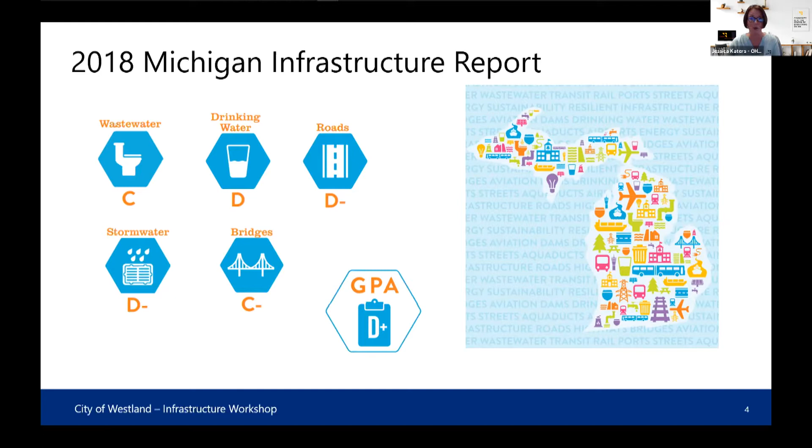The one piece of infrastructure that most people see is your roads. In Southeast Michigan, SEMCOG does an overall road condition rating. They've taken all of their communities and counties and assessed that 21% of the roads are in good condition, 35% are fair, and the rest, 44%, are in poor condition.

The sanitary and sewer systems—SEMCOG has also taken a look at those. Those systems were installed in the 50s and 60s. They're nearing their lifespan, and without rehabilitation or replacement, they will continue to fail us or have breaks and issues with delivering services to our customers.

It's been estimated that Michigan needs an additional $4 billion a year to maintain the existing infrastructure, and this is all from the 2018 report card. We all know that there has not been a major infrastructure infusion of money over the past 2 years, so we are still at this current level of funding need, and there is not currently a funding mechanism to fulfill this need.

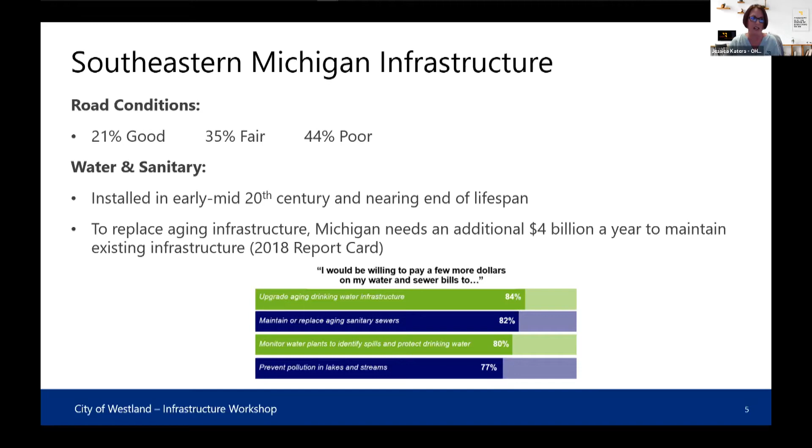One thing that SEMCOG has done is taken a look and surveyed the residents and customers in the region, and they have stated that they are willing to pay a little bit extra in order to upgrade their aging infrastructure, to have a more reliable system, and to replace their aging sanitary sewer systems, to increase the quality of the water delivered to their homes and businesses, and prevent pollution in the lakes and streams and recreation areas that we enjoy here in Southeast Michigan. So it does seem that the customers and citizens of this area certainly understand that there needs to be additional investment in our infrastructure.

One of the infrastructure networks that was part of the campaign for governor last go-around was the Rebuilding Michigan Roads, and we know that there is $800 million in bonds for state infrastructure. This is all great, and it will be a great investment in the MDOT network of roads.

The 5-year transportation plan includes 46 projects of all different magnitudes. The black here shows the projects that are surrounding your area, so there are quite a few highways and freeways in this area that are going to get touched. However, none of this money is going to go to county or local roads, so there's still a need at the local level in order to invest in your road systems.

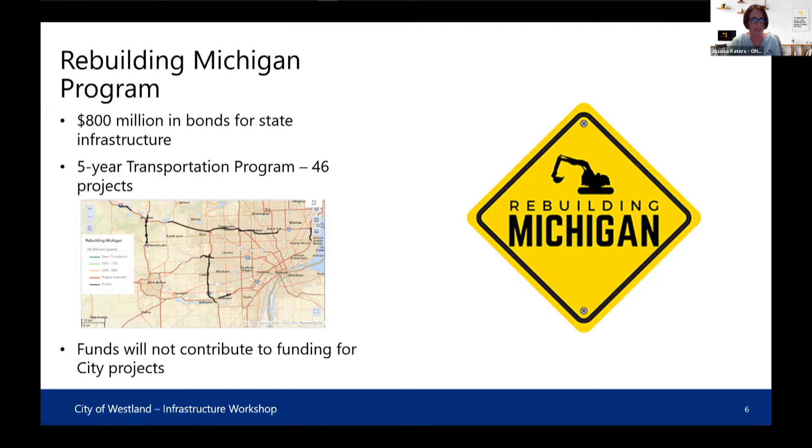When we look at an infrastructure network, it's a layered system, and we want to take a look at it from the bottom layer up. The first layer we want to look at is our sanitary sewer system. Then we'll take a look at water, and then Ramsey is going to give you a summary of your roads and drainage.

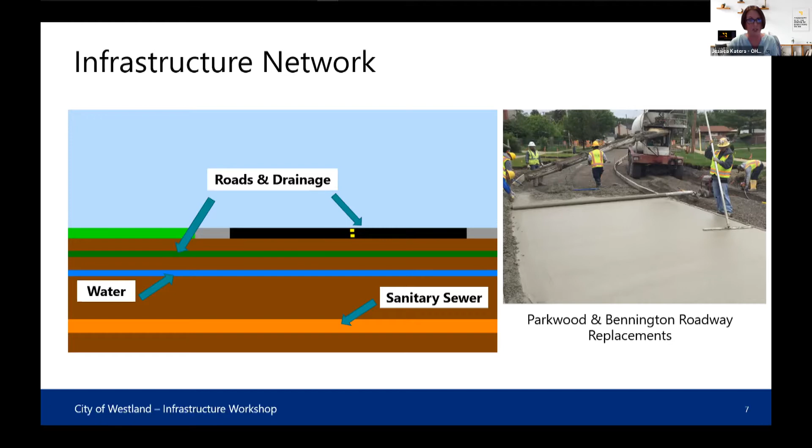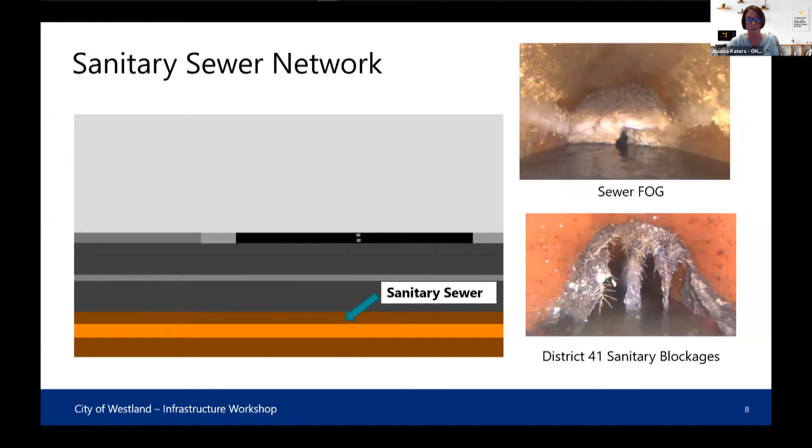Your sanitary sewer network—these are a couple pictures from some of the assessments that have been recently done. It's an unseen network that you never talk about or have much conversation about unless it fails or doesn't do its job. Unfortunately, this type of distress accumulates until we get to a point where we need to do rehabilitation or replacement of the system in order to restore the customer service.

Our network of sewer within Westland—we have 293 miles of sanitary sewer, so it basically mimics the number of road miles, a little bit more than what you have in roads. You have over 7,000 sanitary sewer manholes, so it's a very extensive network of sewage collection system. Some of the sewer pipes are owned by Wayne County, but a good majority of this mileage is owned and maintained by the city of Westland.

Of all of this, about 50% of these sanitary sewers are within the rear yards. Those rear yard sanitary sewer systems are where we find a lot of our failures to occur because we have root intrusion or a collapse of a sewer. Those sanitary sewer systems are of a certain age, a certain material type, and they happen to be in a location where they need rehabilitation in order to continue to function.

Currently, the DPW has partnered with contractors over the last few years to line this system, and we've gotten 5% of the system lined. An additional 95% of this—the 50% of the rear yard system—is still in need of rehabilitation.

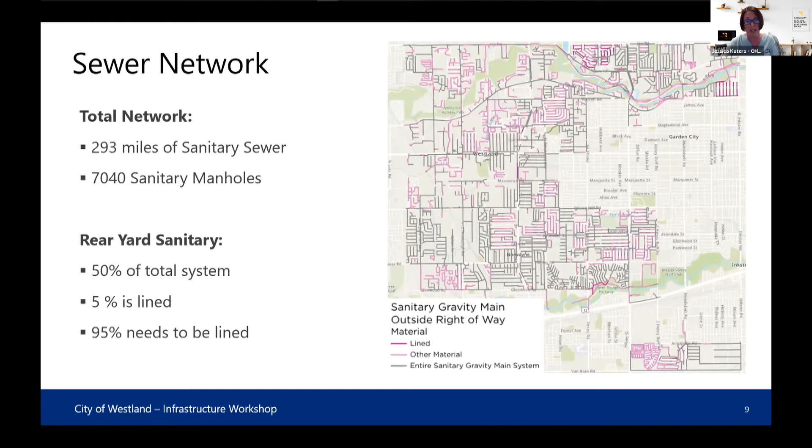When I speak of lining, the rehabilitation methodology that we use for sanitary sewers is cured-in-place pipe, CIPP liner. This gives us another 50 years of lifetime of usage out of this utility.

If you can see here in this picture, this is of a rear yard sanitary sewer. You see that there's cracking in the sewer and then root intrusion. All of this combined adds up to an area that can fail and would possibly cause backups or a collapse in a rear yard.

So the sewer liner gives us, like I said, that additional 50 years of lifetime. It provides us structural integrity, and this is called trenchless technology. It's something that we're able to do with little to no disruption to the residents or the businesses that send their sewage to these pipelines.

Once the sewer is lined, it's ready for service almost immediately. So it's a methodology that gives good customer service.

Currently, the spending is around $2 million per year. This gets us about 7 miles per year lined. If we continued at this $2 million, it would take us another 16 years to line all of the sanitary sewer that's in the rear yards.

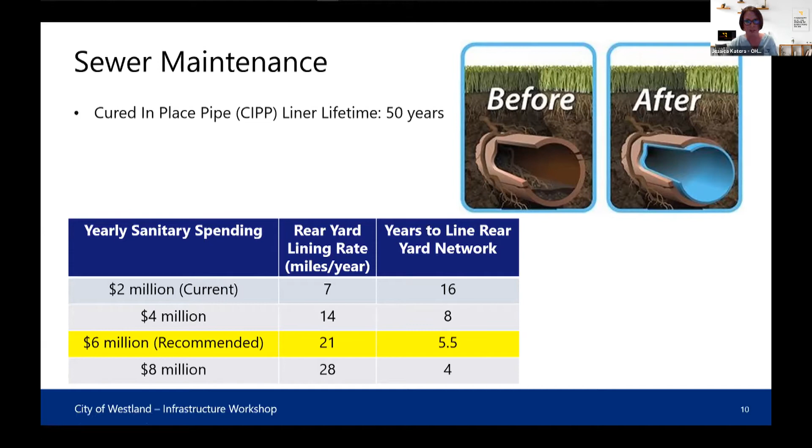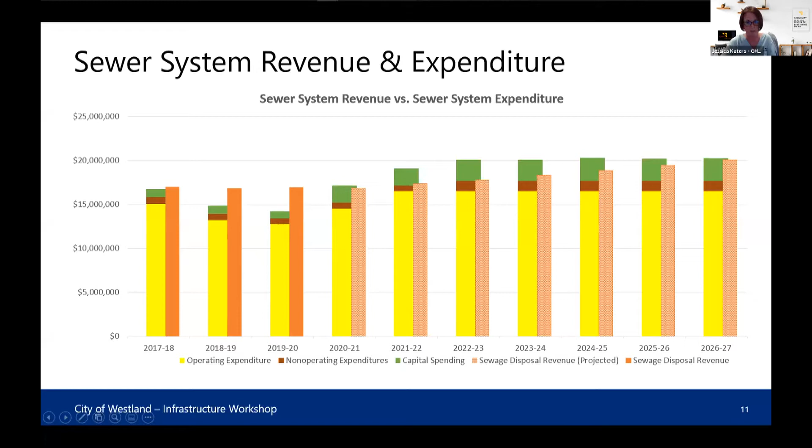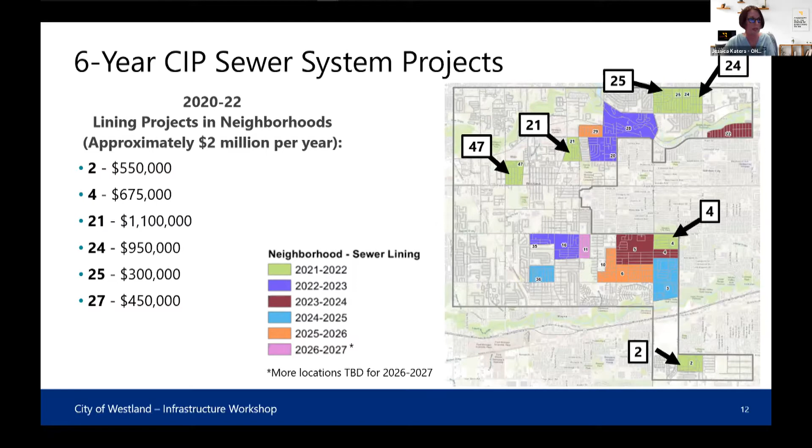The sanitary sewer system that Westland contributes to is the Rouge Valley Sanitary Disposal System. This is owned and operated by Wayne County. You're one of 14 communities that contribute sewage to the system or have their sewage collected from the system.

The city of Westland is 20% of the flow that goes into the sanitary sewer. So there's quite a bit of sewage that is captured from Westland and contributes to the RVSDS. You are one of the major players in the system.

There are proposed upcoming CIP projects that the system needs to incur that will be done by RVSDS, but are incorporated in any rate increases that the county passes on to the 14 communities that contribute to this system. So in regards to this fiscal year, there is manhole rehabilitation that will take I&I, inflow and infiltration, out of the system.

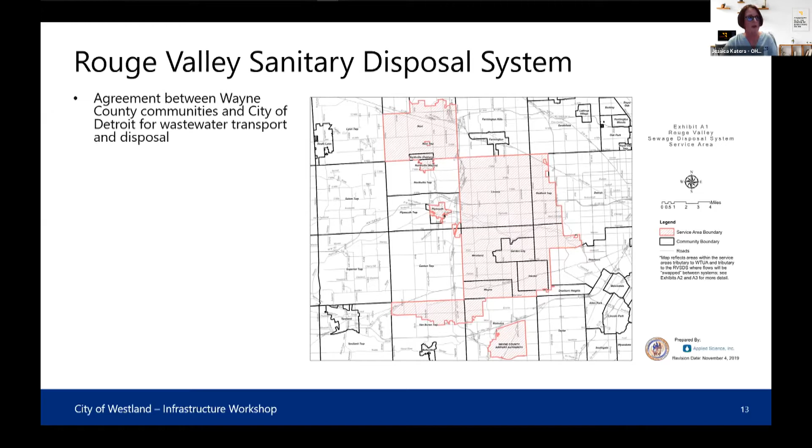That will give additional capacity to the system that was being utilized by rainwater, basically. This agreement was entered into in 2017 between the Wayne County communities and the city of Detroit.

The long-term plan, they are applying for a state revolving fund, and that fund is going to help with those CIP projects. So the more money that is available through that fund, or that would be forgiven through a loan forgiveness program, would reduce the cost to the city of Westland.

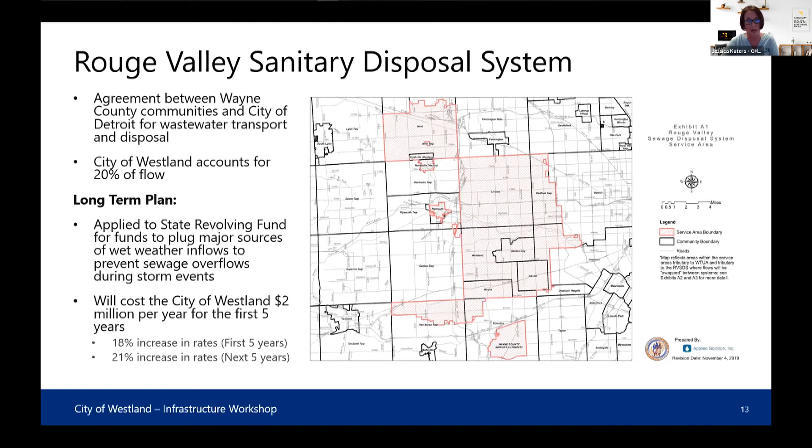That 2017 agreement with the county had an 18% increase built into the first 5 years, and then a 21% increase built into the next 5 years. And that is something that you are currently seeing. The annual payment to the county is around $14 million for sewage disposal right now.

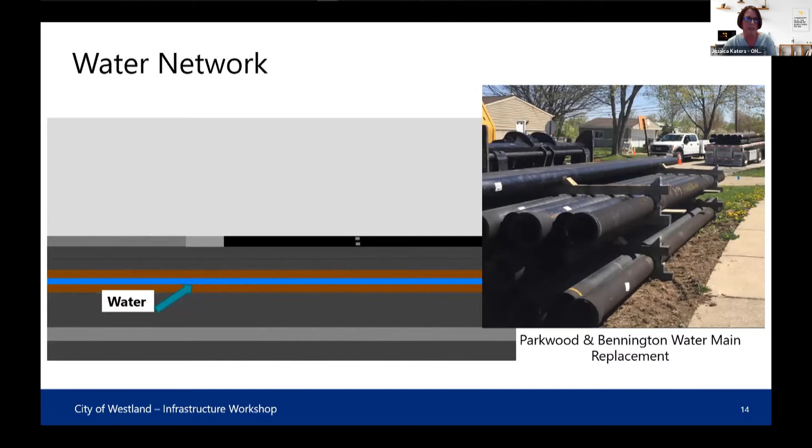The next system that we want to talk about as we move up in the levels is the water network. The water network has about 318 miles of water main, just over 3,200 fire hydrants, and 3,700 gate valves.

This picture, or this map of your water system—all of the blue is water main that is owned and maintained by the city of Westland. The red is your distribution mains from GLWA, and each of these squares are your distribution points from GLWA, so where you're getting water.

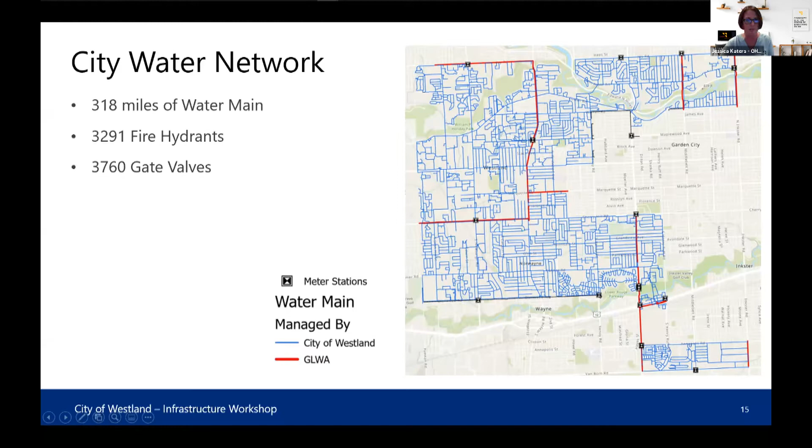Your water main material and your water main age go hand in hand. Water main of a certain age, installed in the 50s and 60s, was cast iron. Then we moved over into ductile iron in the 80s and 90s. We're using HDPE now when we're doing pipe bursting projects. Each one of these materials has a different lifespan.

What we find is that cast iron breaks much more often. It is older and is reaching its lifespan. So you have 80% of your system that is cast iron, and the other 20% is some of those other materials I mentioned. Most of that cast iron, 63% of the overall system, is over 50 years old.

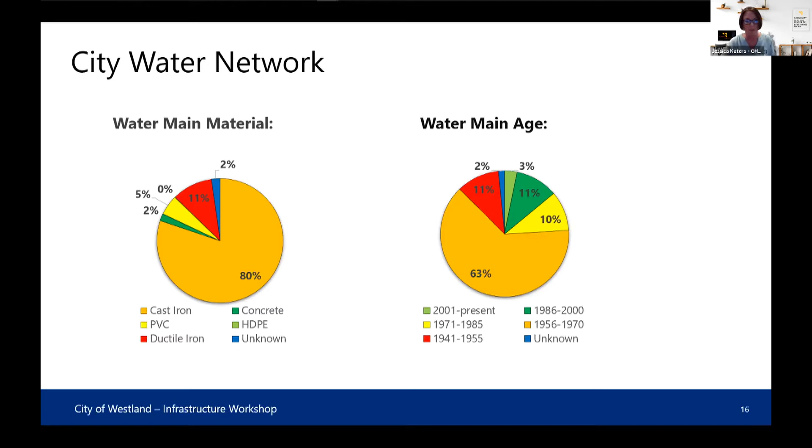One of the things OHM has helped with in the past is completing a water asset management plan. In that plan, we took a look at all of the water mains, the age of the water main, the criticality of the water main, what kind of users it serviced, whether it served a hospital or a school, and also the material of the water main, and came up with a condition assessment for those water mains.

So overall, the system for Westland is a lower risk system, and it matches your adjacent communities as well.

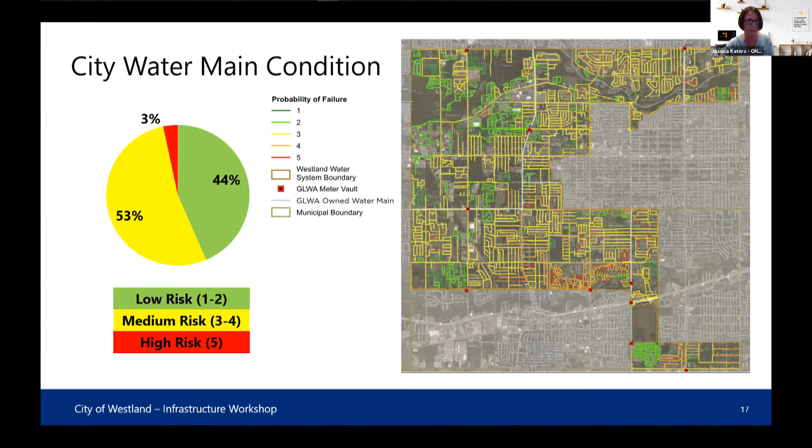Those breaks range from a $4,000 fix to a $10,000 fix, so we're seeing around $500,000 spent on break repair. You can see that the newer sections within the city of Westland just don't have the same amount of breaks as some of the older sections that have that cast iron material.

These numbers of breaks are average. This is an average for that age and that type of material. This isn't out of the ordinary for a system this age.

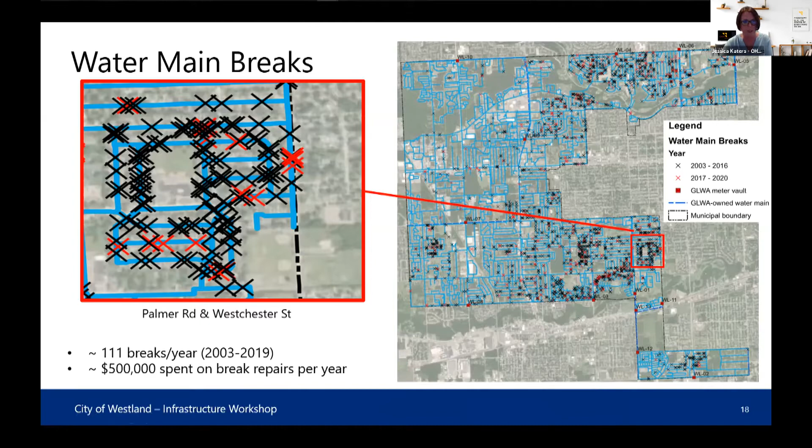Water system replacement tends to be a little bit more expensive than sanitary, especially because most of the time, water system replacement involves either removing or pipe bursting the pipe within the same trench it's currently located in, or installing an all-new system in order to maintain water service for customers during the construction period. So it does tend to be a little bit more costly.

The water main also ends up being underneath pavement in some of the subdivisions, and when you're within the pavement influence, the pavement also has to get replaced with those projects. We're on average replacing about three quarters of a mile per year. On average, it costs from $1 million to $2.5 million, depending on the location of the water main and its size.

Taking all of the water main that had 2 or more breaks within the system, you have approximately 60 miles. At the current rate, it would take us another 80 years to replace all of that water main. If we were to jump up to about 3 miles per year, we'd be looking at a 20-year capital improvement plan in order to replace that water main.

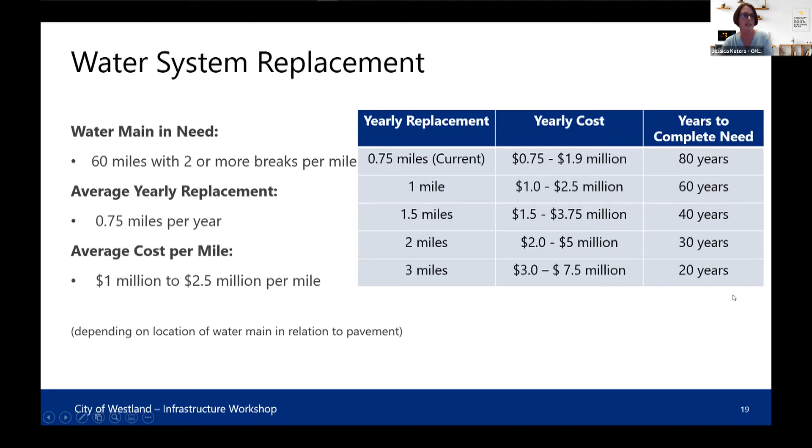But you certainly are jumping up in cost, to a $3 million to $7.5 million mark, if we were to hit that 3 miles per year as an annual replacement rate.

So the next step is to take a look and see what that does to your revenue stream and the operating cost for the system already.

Taking a look here, your operating expenditure includes your payments to GLWA, which on average is about $7 million annually. Then all of your labor, equipment, parts, and energy or power in order to operate the system, your debt payments, and then the green is the CIP — those are your project payments every year, the project work and project budgets. The orange is the revenue that has been collected from the system, and the projected revenues are shown in that dashed line.

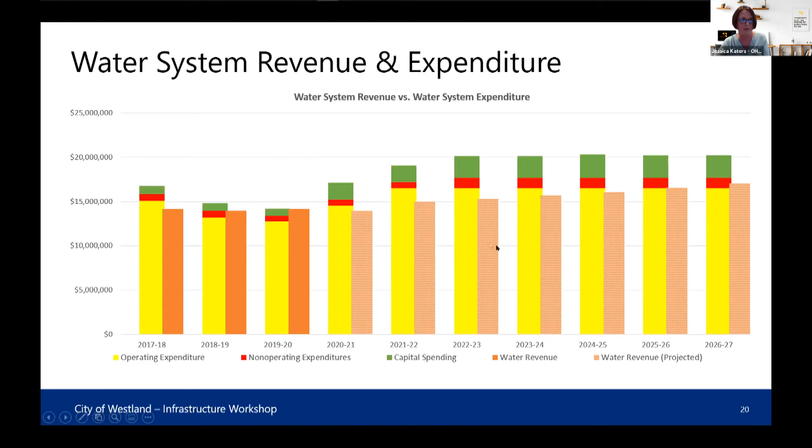You are on your third year of a rate study that was done in 2018. I believe the finance department will be bringing forward a proposal to reevaluate and analyze the rates again. Part of that reevaluation will be to take a look and see how much you want to spend in CIP work to rehab and upgrade the systems to keep them functioning.

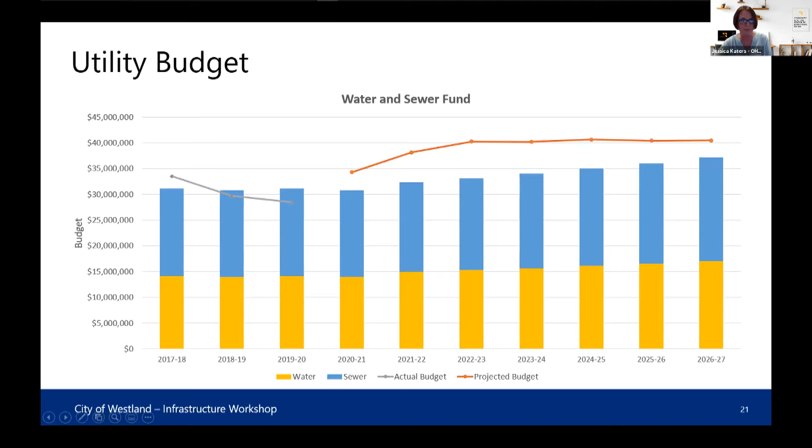Again, like the sanitary sewer, we have certain neighborhoods that we're targeting for the water with the DPW, the administration there. We've sat down and taken a look at those neighborhoods and come up with a 6-year CIP water system project plan.

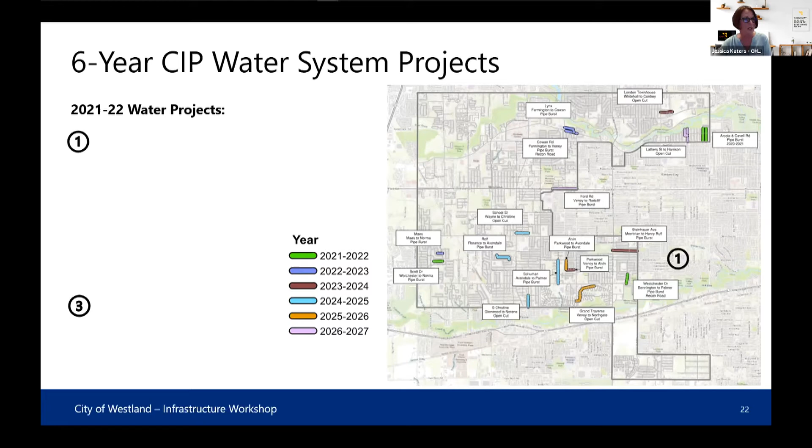We are looking at pipe bursting and road reconstruction from Westchester. Again, another pipe bursting project, Scott Road from Worchester to Norma. And then the other component of the 6-year CIP plan is replacements of galvanized water services.

This is to be in compliance with the 2018 lead and copper ruling that came about in Michigan. In order to be in compliance with that ruling, we had to file an inventory in 2020 of where we were with the lead, copper, and galvanized services. A final inventory of all of the services is due to EGLE by 2025. And then all lead and galvanized services must be removed from the system by January 1st of 2041.

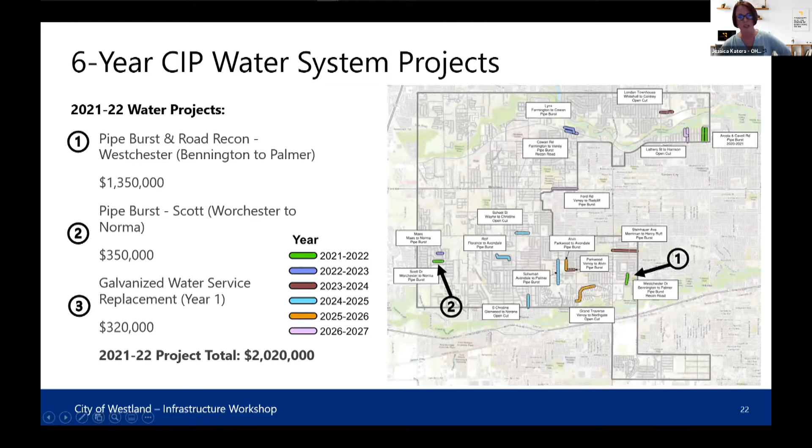Currently, the $320,000 that we were proposing over the next 19 years would replace the services that we know of right now in the system.

We have 39% of the system that has been identified. 200 of those services are known to be galvanized. We're replacing those at around 40 services per year in the 6-year CIP.

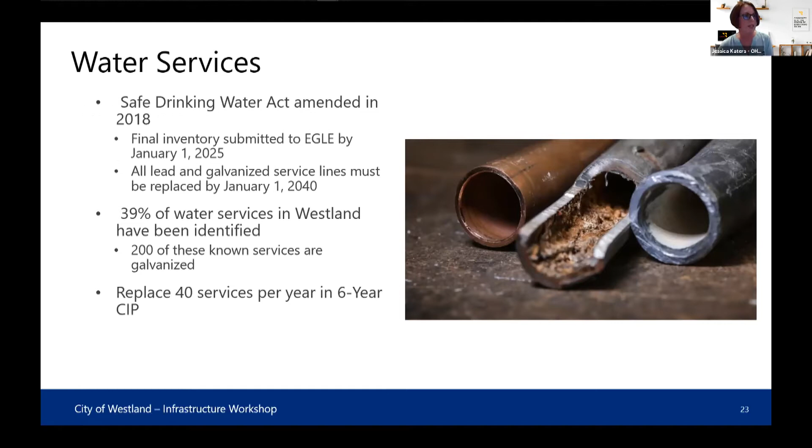And then on Earth Day, the city of Westland is going to be rolling out a program to engage the public to help identify that other 60% of the services that we aren't sure what they are currently. So there'll be some public information sent out to homes, and then the residents will be able to report back what their services are. That will help the city gauge better how much money and how many services they'll have to replace between now and that 2040 date.

The total number of services within the Westland system is just under 30,000 services.

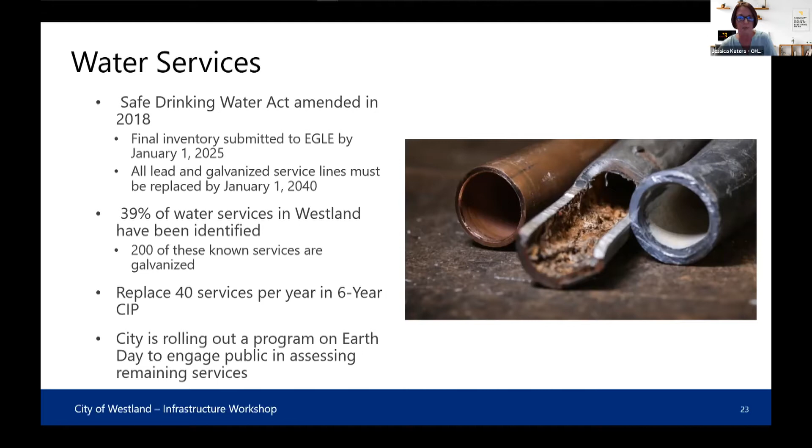One of the initiatives that the Westland City Council and Mayor Wild have taken on is investigating the potential of a water authority with some of your neighboring communities, in order to become a larger customer to GLWA. Becoming part of the water authority could lower your water rates to GLWA and free up some more capital that could be reinvested in the system. It would also allow you to be a larger voice at the table with GLWA.

You'd be a larger customer, what's considered a max day customer, which would allow for a lower revenue requirement rate for the utility authority on a whole. So if the utility authority was to form, there would be initial savings without any additional infrastructure investment.

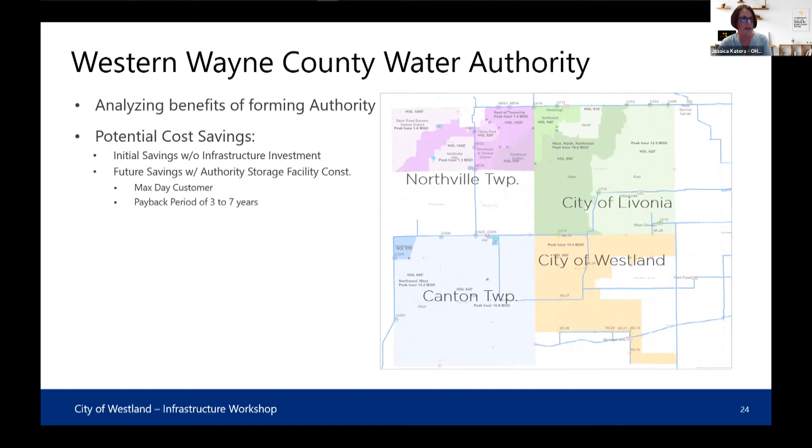There's also been an analysis that would require a storage facility to be built, and then a payback period of 3 to 7 years depending on how large the facility is. That would allow the authority to become a max day customer, which again will give us a better rate with GLWA and more of a say possibly at the table.

So the last layer of our infrastructure is the roads and drainage layer, and Ramsey was going to speak to this section. Thank you, Jessica.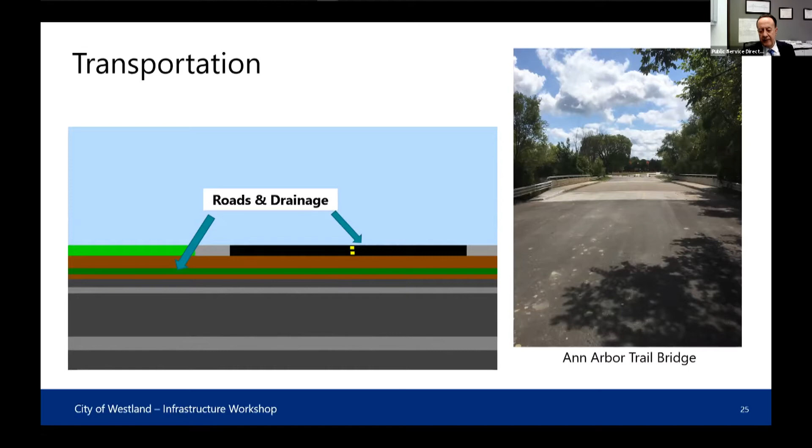As Jessica said, this is our third layer of infrastructure, which includes our road network and our drainage system, or the stormwater system that is contiguous to the road system.

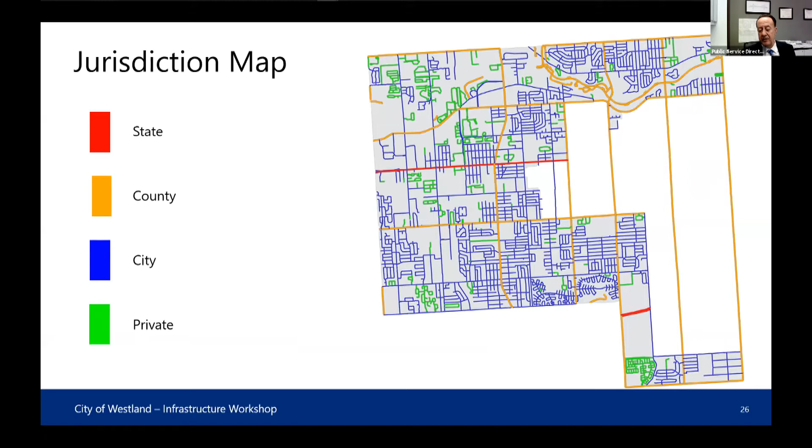This is the jurisdiction map of the city's road systems. As you know, we have state roads such as Ford and Michigan Avenue, and we have the county road system, such as Cherry Hill, Middle Belt, and Inkster Road. Then we have the city road system, which are in blue. The city road system is divided into two components: one is the local road system, like the subdivision or neighborhood streets, and the major road system, which is the collector roads, such as Hicks, Avondale, and Marquette, and those major streets in the city. And of course, we have the private roads, which are the subdivision streets not under the jurisdiction of the city.

The city road network summary: we have about 211 miles of city-owned roads, 139 miles of these roads are concrete and 65 miles asphalt, and we have about 7 miles of gravel road.

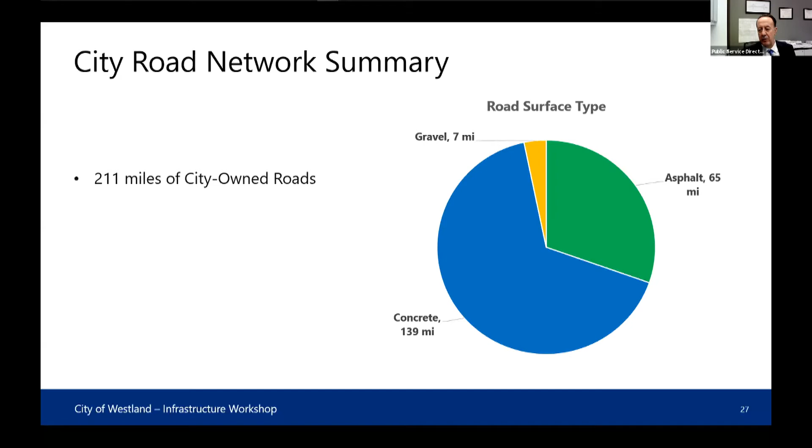We evaluate our roads using a PASER system to assess their condition. This is required by the Michigan Department of Transportation, and we have been using this system since 2005.

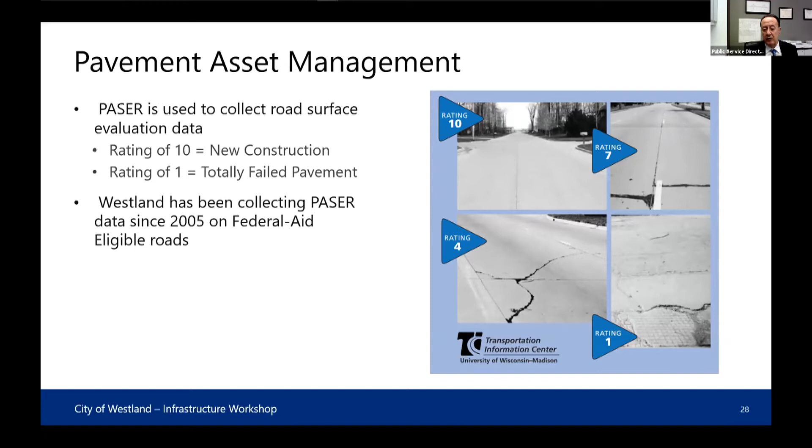PASER stands for Pavement Surface Evaluation and Rating. The rating we use is between 1 and 10, where 10 is new construction and 1 is a totally failed pavement.

This map goes back to 2019, because we do this rating every 2 years. The next one is due in 2021, and right now we are preparing to complete our rating in the next couple of months or so.

As you can see from these color-coded ratings, we have about 24 miles of our roads which we consider totally failed, and about 99 miles rated 3 to 4, which are poor.

Then 75 miles are fair, and so on. We only have about 9 miles of roads in the city that we consider good roads.

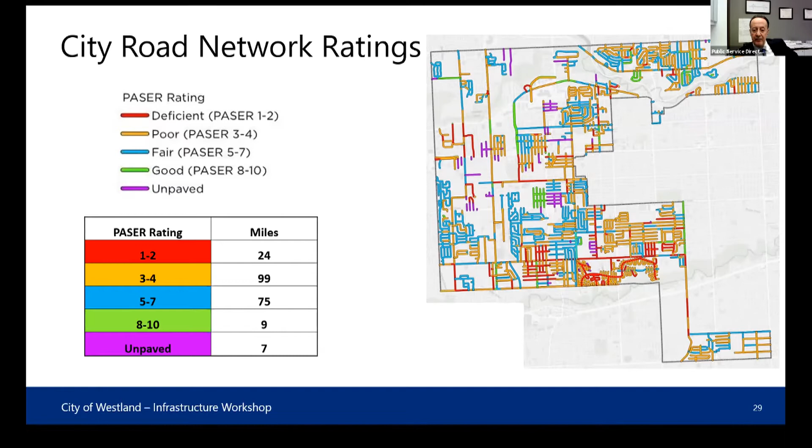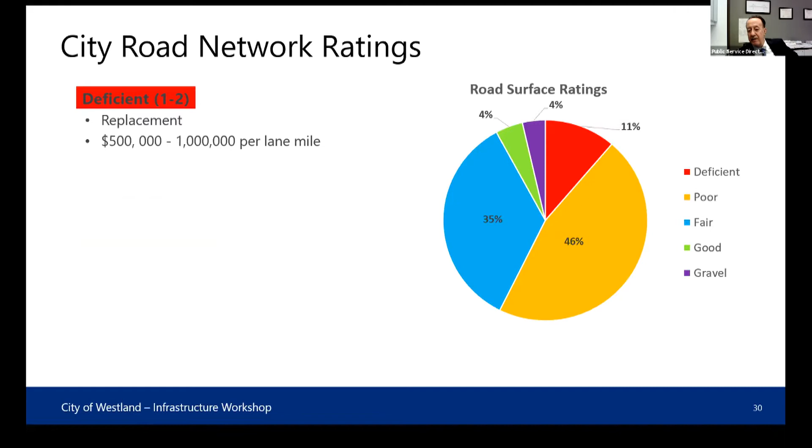As you can see, the poor and failing road ratings comprise about 57% of our roads, and 35% are fair roads.

From what you can see here, to rehabilitate a deficient road or a totally failed road, it will cost us about $500,000 to $1 million per lane mile.

The poor roads will cost us, for heavy rehab, about $350,000 per lane mile. The fair roads and better will cost between $20,000 to $30,000 per lane mile.

This is what we call preventative maintenance, which we consider between fair and good. The good roads will cost about $5,000 to $15,000 per lane mile.

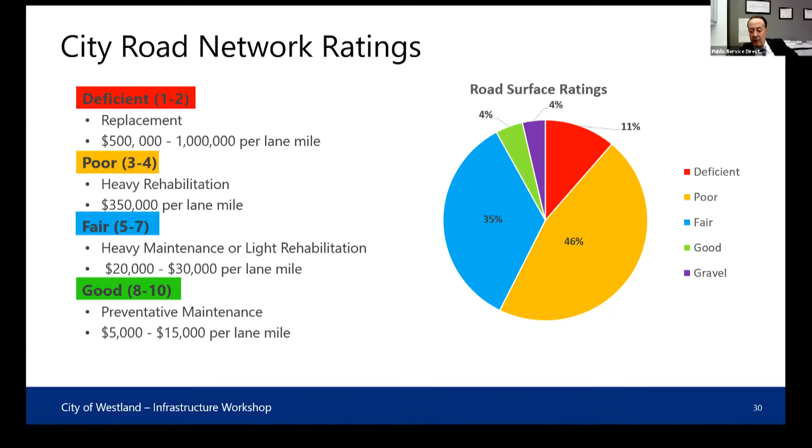Where we could extend the service life of our road system between 5 and 10 years.

We have been using preventative maintenance in the city for the past 5 years, where most of our road projects are done under preventative maintenance. As you know, this is more cost effective for maintaining our roads and keeping them safe for vehicular traffic.

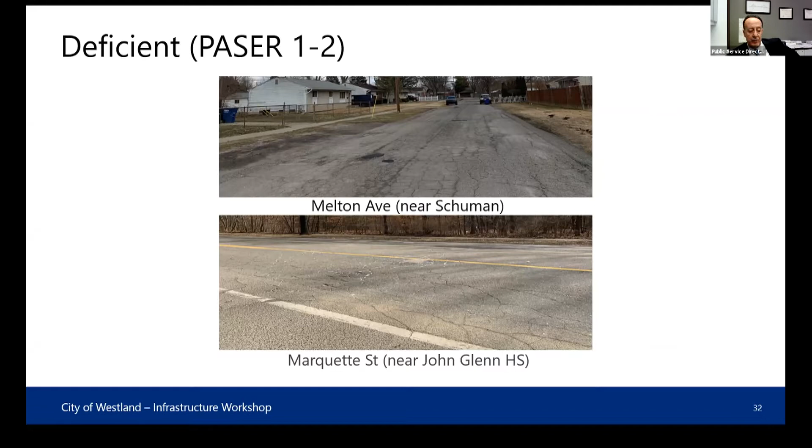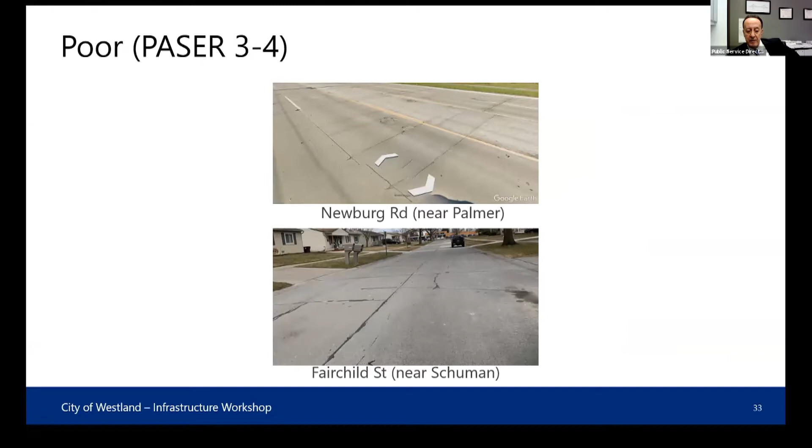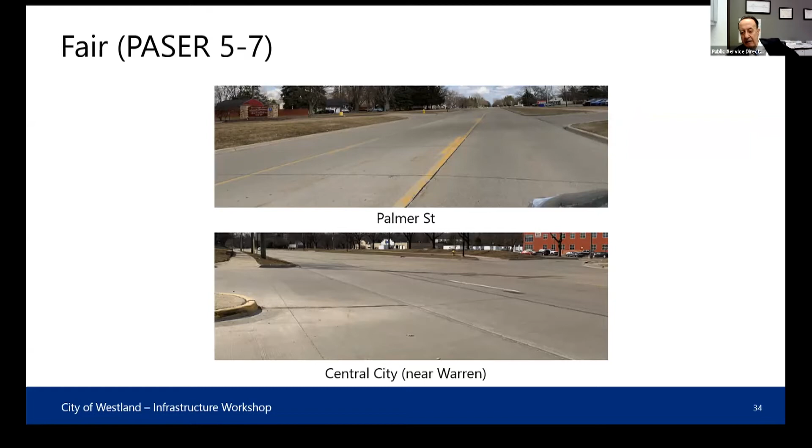This is 5 to 7, which is the fair roads in the city. This is where we want our street system to be, in a fair to good grading, between 5 and 10. This example is at Palmer Street and Central City Parkway near Warren Road.

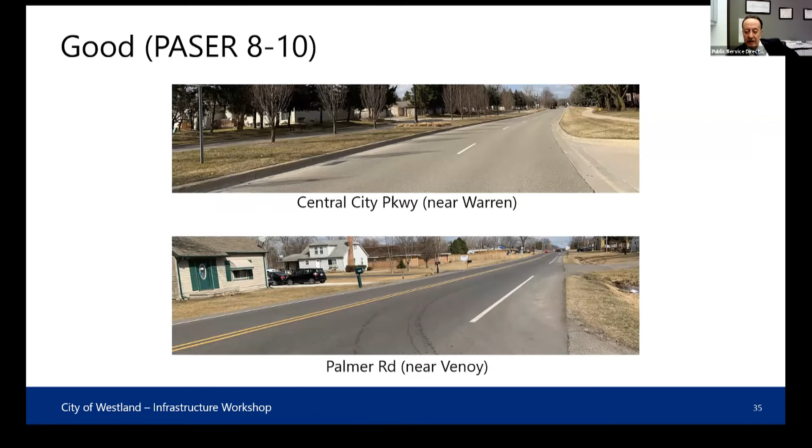As the city of Westland in Wayne County, we belong with all Wayne County communities to a committee called the Federal Aid Committee, where we receive federal funds from the state through the federal government. We receive about $16 million of funds each year.

We have a steering committee, which I have been a member of for the past 25 years, that meets to select roads to rebuild throughout Wayne County.

75% of the $16 million will go towards county road, and 25% will go towards city streets that are on the federal system. What I mean by city streets on the federal system, this is such as Newburgh Road and John Hicks Road and Ann Arbor Trail and Palmer Road. So those are city roads that are on the federal system.

And this year we are doing Newburgh Road between Cherry Hill to Ford Road. This is about $1.2 million for the federal grant that we should receive. This project should be bid by the state in June and should be constructed this summer.

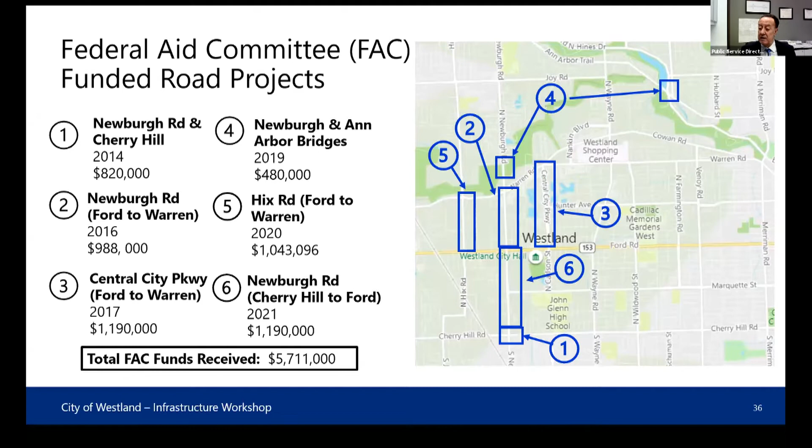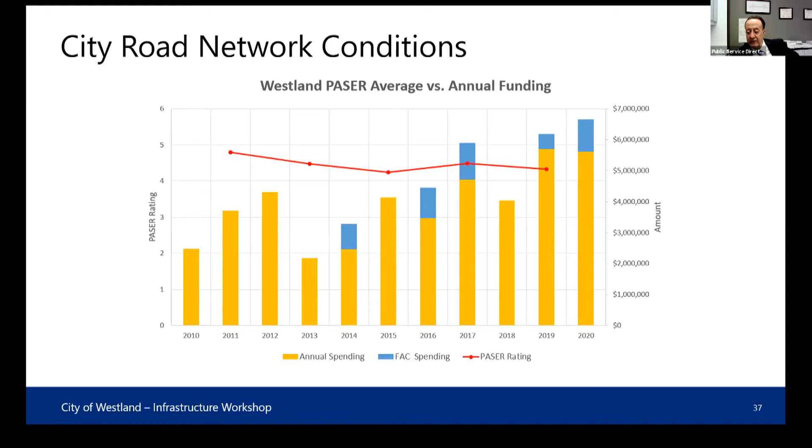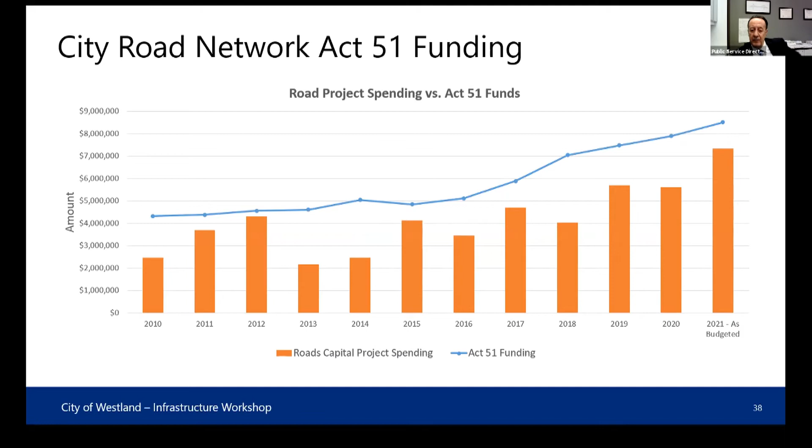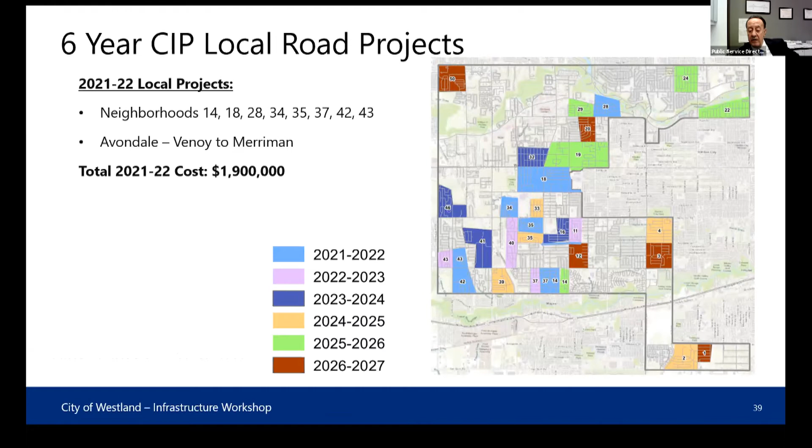And this is all the blue districts that you could see on the map, and Avondale between Venoy Road and Merriman Road. Let's go back to that slide. The total cost for 2021 to 22 local road rehab is close to $2 million.

And these are the districts that we spoke about that we will be redoing this year: neighborhood 14, which is the street limit between South Christine to Wildwood and Palmer to Glenwood; 34 is Pattingill to Lansdowne Drive and Dartmouth to Cherry Hill; neighborhood 42, south of John Hix to Barnes and Palmer to Glenwood, and so on. So we have a very progressive project year planned for this year.

The 6-year CIP for our major road program, again, is color coded per year. The green color is the streets that we will be doing this year. We are doing close to 7 major roads this year: Yale, Carlson, Superior Parkway, John Hix and Florence, Grand Traverse Phase 1, and Newburgh Road, which is the state project we just spoke about. Our local share of this project is $400,000. So we're talking about a $1.5 million job that the state would leverage about $1.2 million worth of grants for, a beautiful job we will be doing this summer.

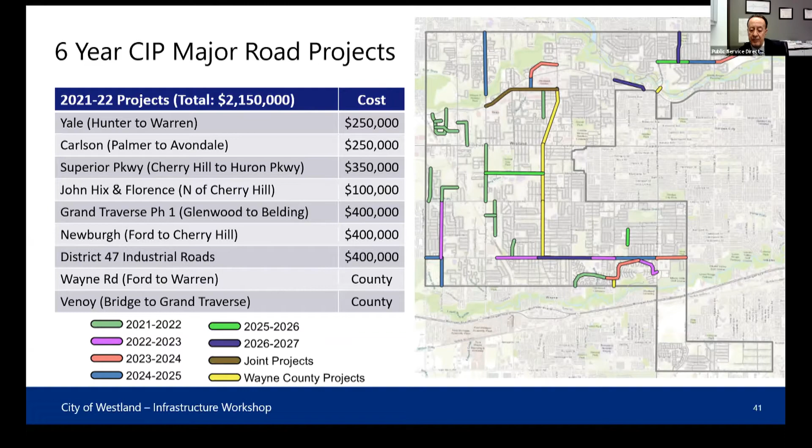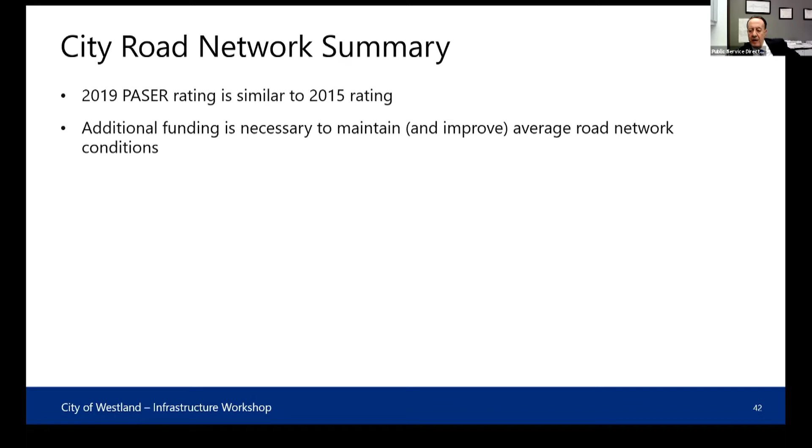The city road network summary between 2019 and 2015 is very similar, because our roads are deteriorating faster than we could maintain them. Additional funding is, of course, necessary to maintain and improve average road network conditions, which is a rating of over 5. The Transportation Asset Management Plan is due in 2022 to the state of Michigan, which will verify and update our goals for our road network.

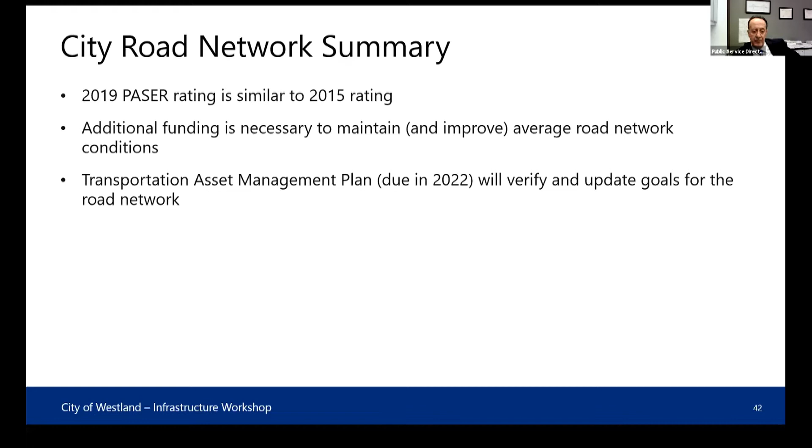The city is responsible for the maintenance of about 5 bridges in the city of Westland. These bridges are Ann Arbor Trail over the Middle Rouge, John Hix over Tonquish Creek, Newburgh Road over Tonquish Creek, Henry Ruff over the Lower River Rouge, and the CSX Railroad at Newburgh Road, which is the grade separation.

By MDOT's regulations and requirements, we have to inspect these bridges biannually. So every 2 years, we have to have an inspection regarding the elements of this bridge, superstructure and substructure, to see if there are any deficiencies. It's due this year, 2021, and we would submit to the state. Anytime we find major deficiencies, we either have to limit the loads or weight limit on that bridge, or do the required repairs.

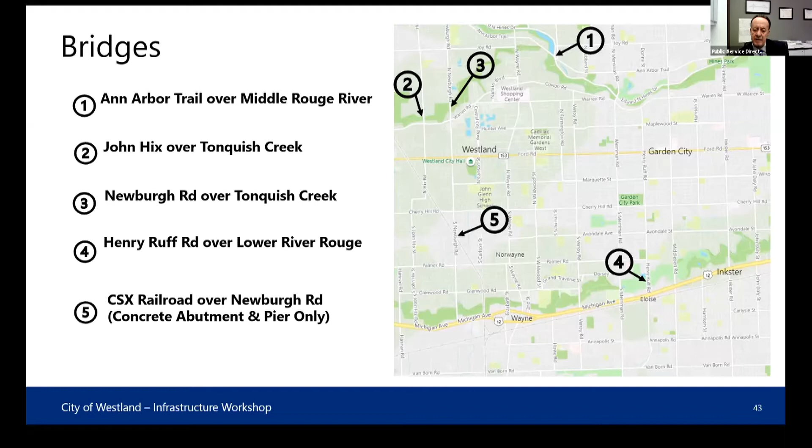We have been successful in leveraging some state money. If you remember, last year's project redid the superstructure of Newburgh Road, north of Warren, and the Ann Arbor Trail Bridge. About 4 years ago, we redid the pavement and the substructure at Henry Ruff Road over the Lower River Rouge.

We have been very successful in leveraging some TAP grant, which is Transportation Alternative Grant, to install sidewalk gaps in the city. We have received over $800,000 in the past 4 years, with the help of OHM and SEMCOG, who are the award authority. We did about 4 projects so far: in Newburgh south of Joy, Marquette in front of John Glenn High School, Schuman Road from Palmer to Avondale, and Palmer Road from Hambleton to Christine. These projects have been completed so far.

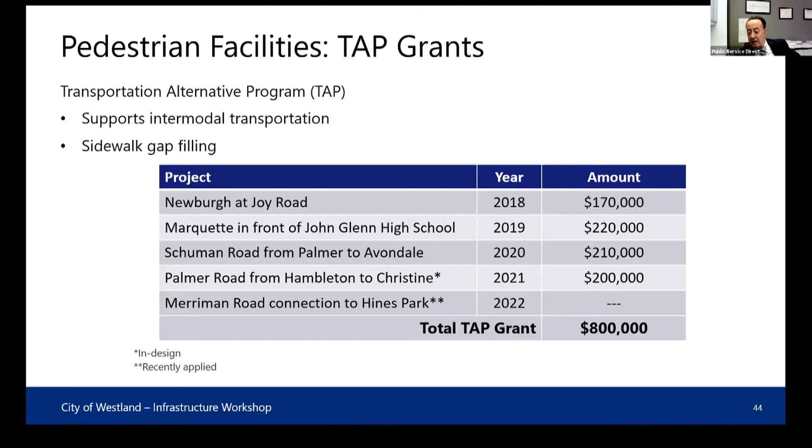This year we have a project application for Merriman Road, south of Ann Arbor Trail, to connect to Hines Park. We are working right now with OHM to complete this project application, and hopefully we'll be successful next year in receiving a grant for this important project.

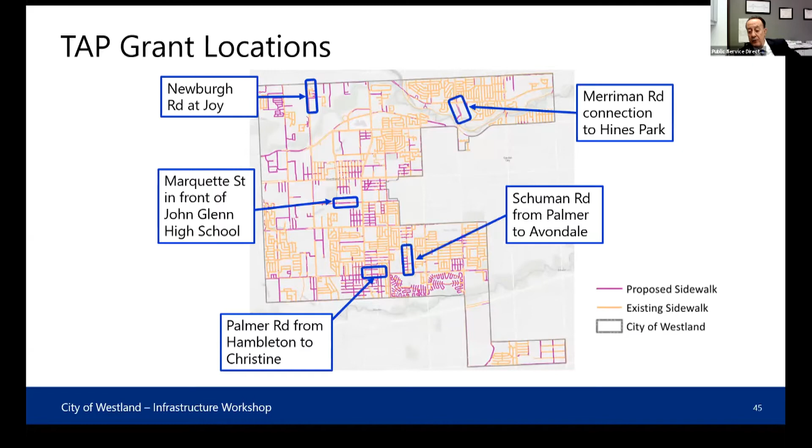The TAP grant locations, as you can see on the city map, are very close to schools in the city, and they are scattered throughout the city.

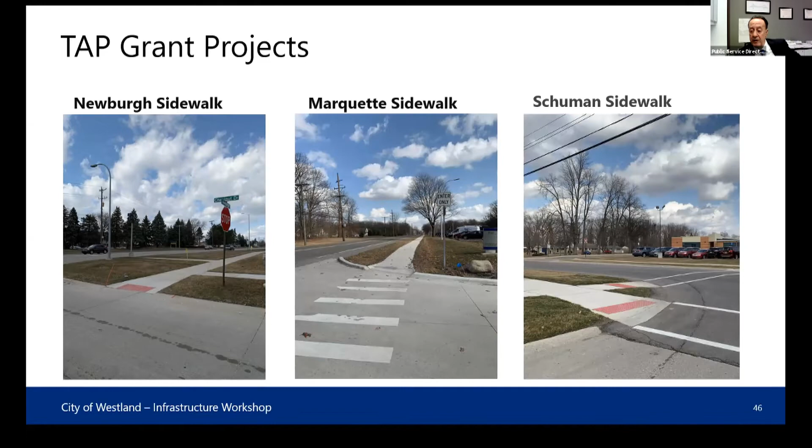These are some pictures of the TAP grant sidewalk gap installations that we have completed over the past few years.

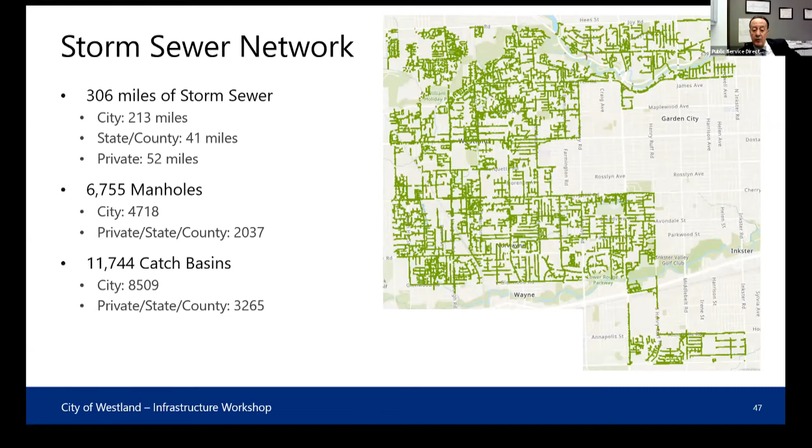The storm sewer network in the city has over 306 miles of storm sewer. The majority, or 2/3 of it, is city-owned; the rest is state and county, with about 52 miles of private storm sewer network. We have close to 7,000 manholes, 2/3 city and 1/3 private, state and county. We have close to 12,000 catch basins, with the city owning about 8,500 of them.

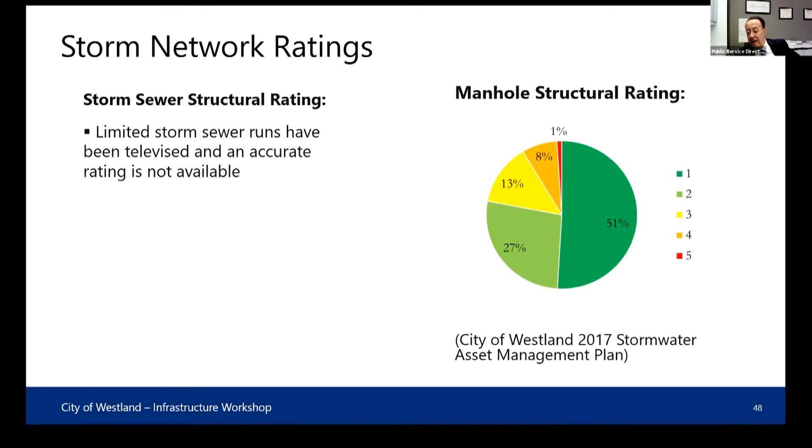For the storm network rating, we have very limited surveys or televising of these storm sewers, but we have a good manhole structure rating where we inspect through our neighborhood makeover program and city projects. Right now, over 75% of the manholes and catch basins we can see and inspect are in fair condition.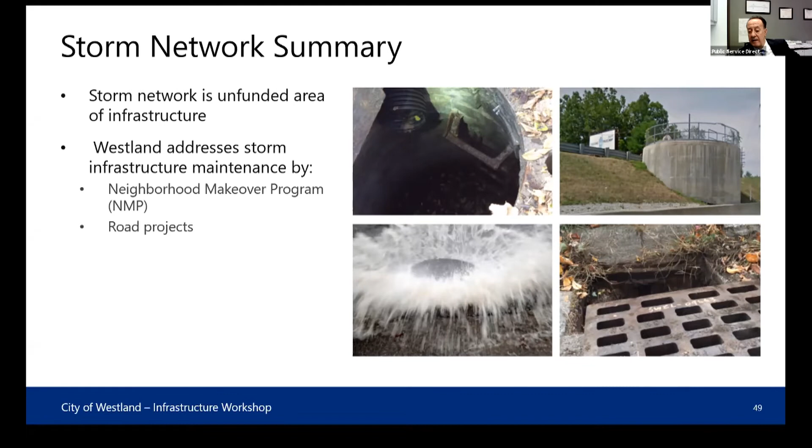This is the storm sewer network, which is an unfunded area. We maintain it when doing road projects or through the neighborhood makeover program, where, as you've seen over the past 4 years, our crews throughout the city inspect the catch basins and manholes, vactor any debris, and inspect these structures for failures, then send them to our contractors for repairs.

Well, I think I'm done.

Yeah, you did great. Ready for council questions, and I believe we are on time at 6:49. I said you had 50 minutes and you hit 48 minutes. So great job to both of you.

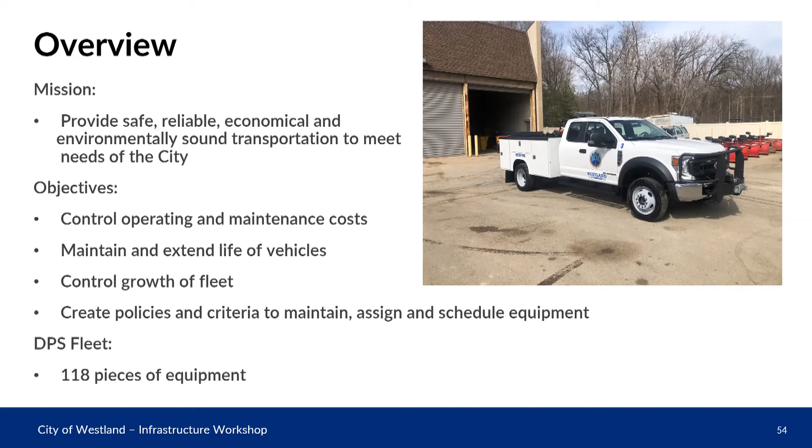Our fleet consists of 118 pieces of equipment, approximately half of which are vehicles, and the other half are mowers, backhoes, patching machines, trailers with motors, and things of that sort. We have a wide variety of different pieces under that category.

The 2 main categories of our plan are preventive maintenance, which I've talked about, to avoid costly repairs and extend the life of the vehicles, and the criteria we use when it's time to replace or recommend replacing equipment.

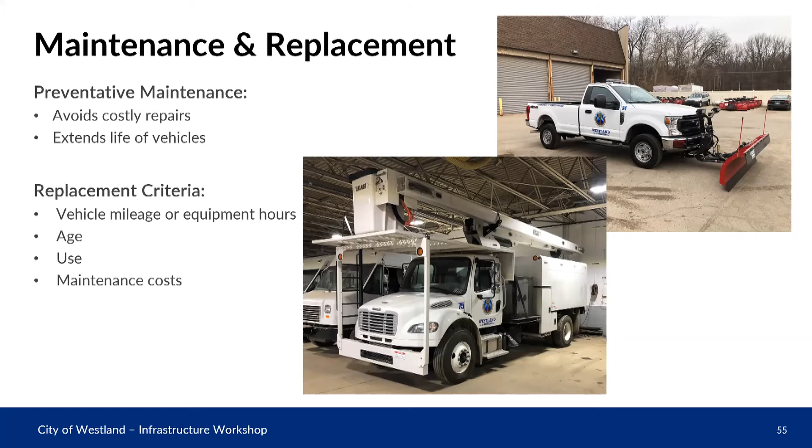This is broken down into 4 categories: the mileage, and more importantly in a lot of our equipment, the equipment hours; the age of the equipment; the usage—is it critical, does it go out every day, do we only have one, if it's down what happens, are we renting or looking for mutual aid; and the maintenance cost. Eventually it gets to a point where even though a piece of equipment may be in good running order, the maintenance cost will tend to escalate, and ideally we would be recommending replacement before that piece of equipment goes into failure.

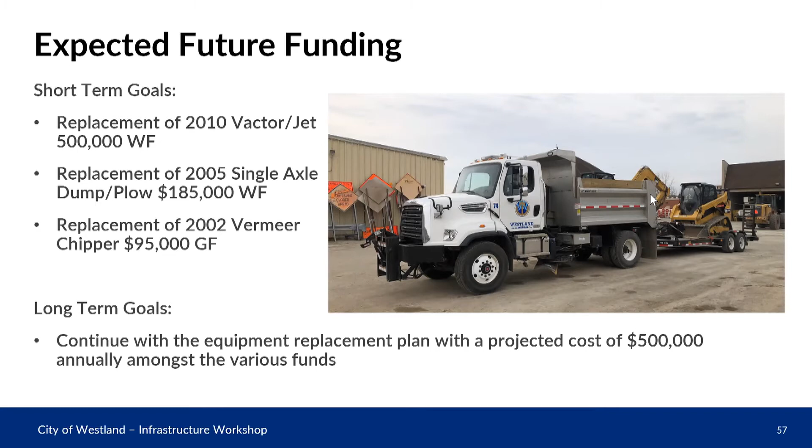All right, then moving on to the fire department. Chief, are you on? I am, thank you.

All right, so we have the Westland Fire Department fleet here. The department maintains a fleet of approximately 20 vehicles, consisting of 6 fire trucks and 7 rescue ambulances. We also have 9 support vehicles in the fire administration. All vehicles are used on a daily basis, and we have an additional specialty vehicle maintained for arson investigations.

Basically, we have engines that provide the pumping for the fire attack, and carry the NFPA mandated equipment necessary for performing emergency services, such as air tanks, ladders, EMS supplies, jaws, and various tools.

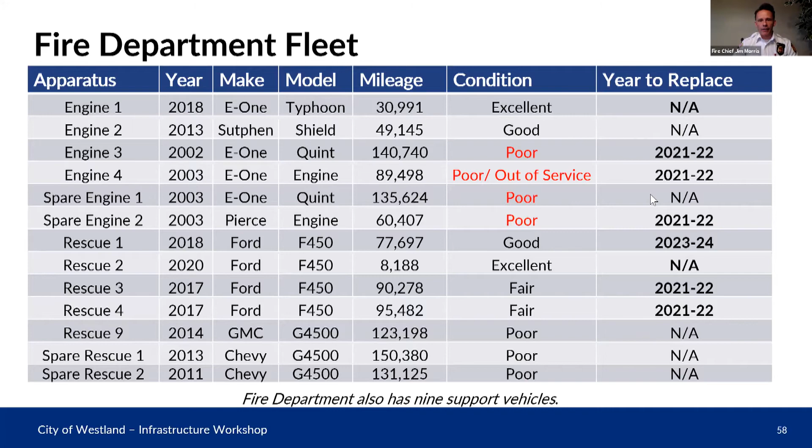The current fleet of fire trucks has an average age of 2007, with approximately an average mileage of 85,000 miles. Each has a life expectancy of approximately 10 to 15 years. The current fleet of rescue ambulances has an average age of 2015, with a life expectancy of about 4 to 5 years.

So the short-term needs for the fire department would be 2 fire trucks dated 2003 and 2002, and 1 rescue. The long-term needs would be 1 rescue every year, and to forecast fire trucks per their life expectancy of that 10 to 15 year range.

Approximate cost of a fire truck is $575,000, delivered 10 months after the order date. A ladder truck is a bit more expensive at $815,000 post order. Approximate cost for a rescue is $227,000, about 5 months when you order a rescue.

Our post frontline trucks function as backup reserves for about 4 to 5 years as well. The backup and reserve status essentially means these vehicles are rotated back into frontline service as maintenance is performed on the primary truck. This has to occur in order to allow for continuous and uninterrupted emergency service.

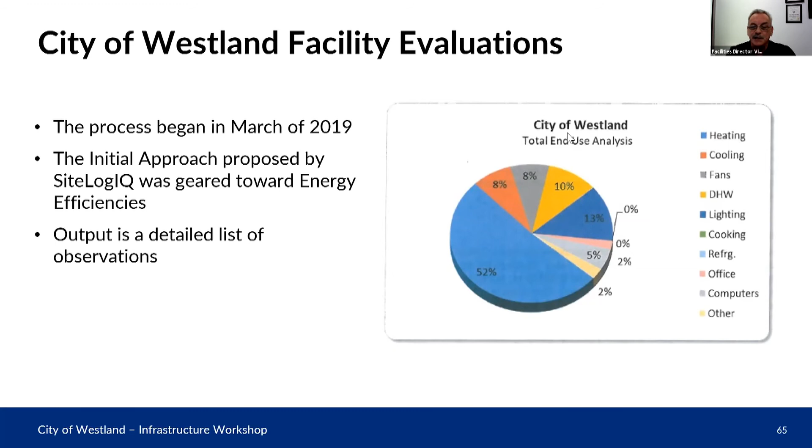Through discussions, additional goals between George and I and expectations were mutually agreed upon and established regarding the depth of the evaluation process, information to be shared, and the development of a more flexible evaluation tool, which we'll briefly discuss in this presentation. Next slide, Scott.

Establish a data-driven ranking methodology to prioritize needs based on specific criteria. From my old days at Ford Motor Company, these top priorities also apply here in the city. Safety being top priority for all of what we do. Looking at equipment life cycles and the age of our equipment, energy and operational savings, cost benefit analysis, and of course, return on your investment.

Long-range goals to provide a flexible tool capable of supporting and maintaining a strategic 5-year plan as we progress. Next slide, Scott.

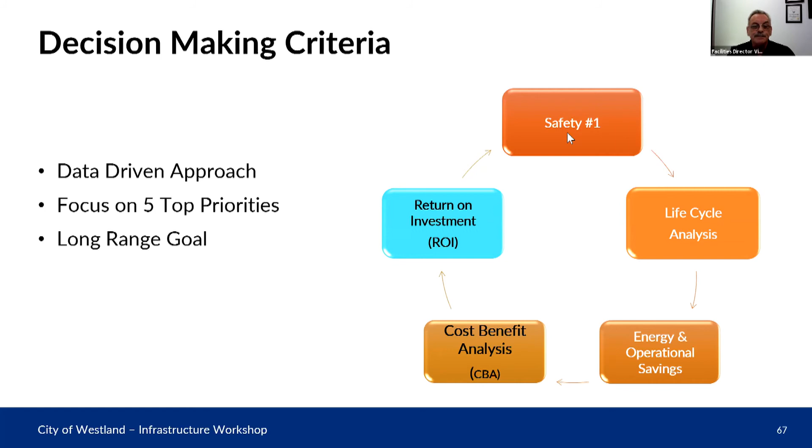Again, this condition assessment report is very detailed and, quite frankly, allowed us to establish a baseline for the city's assets, which is ultimately allowing your facilities director, Vic, to put together a 5-year strategic plan. Next slide, please.

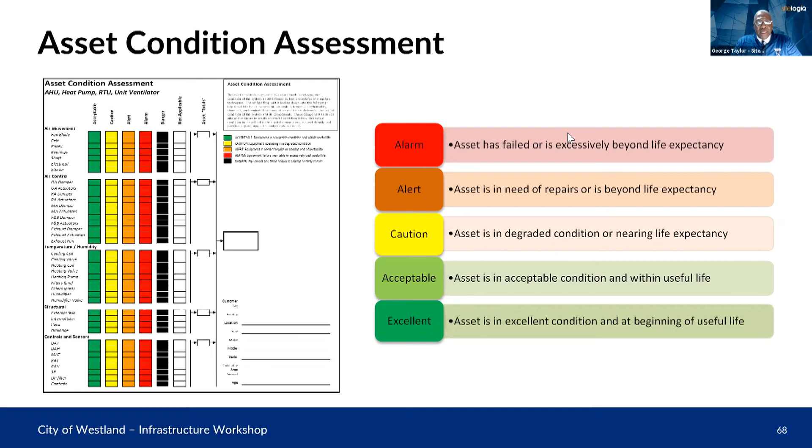Once we capture all that data, like Vic said, we're kind of nerdy in this regard. This is the tool that he referenced as it relates to where that information goes and the ability to score and rank the data once we've captured it. What you see here before you is a sample cut from the facility tool.

And what we did as a result of dialogue back and forth was customize the tool so that, specific to Westland, in order to capture the data for all the facility infrastructure needs. Again, this is a quick snapshot. If you can imagine, each one of the assets in all your facilities were scored and ranked accordingly with that red, yellow, green assessment.

Across the top of the tool, you can see the categories from equipment age and life expectancy to asset condition. We come up with recommendations for each asset that has reached its life expectancy, looking at ASHRAE standards for useful life and remaining life, which gives us the ranking necessary for Vic and the director to make a decision. In keeping with our return on investment analysis, we also apply utility, operational and maintenance savings along with any rebates available, since we work with the local utility company to drive those rebates.

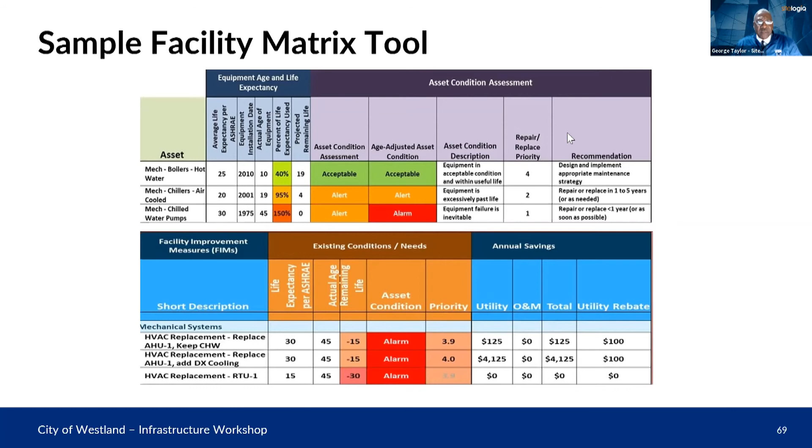In addition to individually ranking each location by its current condition, the matrix tool allows us to estimate the financial impacts of the recommended upgrades. Looking at the data from this perspective, you can see the value of this approach as I formulate my department's 5-year plan.

As it relates to the output of the tool, the facilities that bubbled up to the top as highest priority needs were the police department and Jefferson Barns, from an infrastructure standpoint. These are the two facilities we'd like to target for years 1 and 2 of the 5-year strategic plan. The financial investment for both facilities combined would be approximately $2.9 million, with an annual energy savings impact of approximately $40,000 a year.

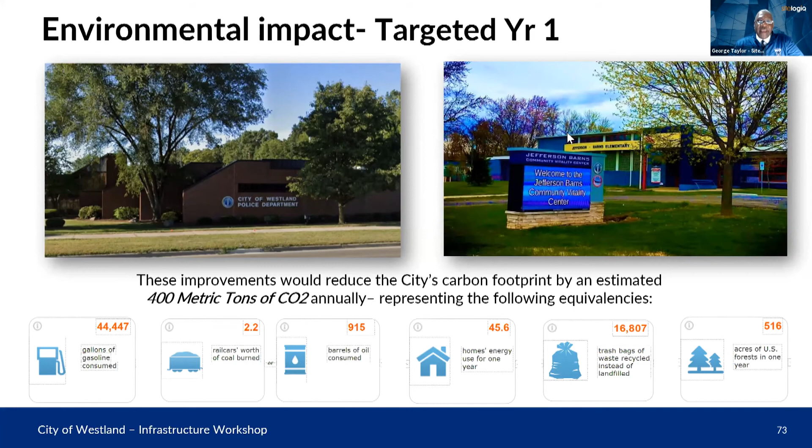In closing, I'd like to remind council that the data presented today is just a snapshot of our mechanical, electrical, and lighting needs only. Moving forward, I will be adding additional needs to this tool, including items such as parking lot and sidewalk needs, facade restorations and maintenance, external lighting, etc. I would be more than happy to meet with council members individually or collectively to discuss specific project recommendations in greater detail as we move forward.

Feel free to reach out to myself. George and I can meet together with council in any format you choose as we start to target specific projects for improvement. And with that, I'm done.

Thanks. Wow, Vic Barra got through in less than 10 minutes. How about a round of applause for that? Thank you, Vic, and thank you, George. Great presentation. First hand I see raised, I believe, is Councilwoman Green.

Thank you. I'd like to thank everyone who presented information tonight. This was a phenomenal, informative presentation.

My question is, can you turn back? It looks like the slide is on page 73. Can you go back to page 70, please?

Okay, so just from what's actually reflected on this page, it looks like the police department and Fire Station 3 have a larger section of alarm area, which are the items in most dire need. On page 72, I believe, the police department and Jefferson Barns were discussed as the priority for years 1 and 2. My question is, since Jefferson Barns has a larger portion of their facility that is not as in dire need as Fire Station 3, why would we not make Fire Station 3 the priority with the police department in years 1 and 2, and push Jefferson Barns back?

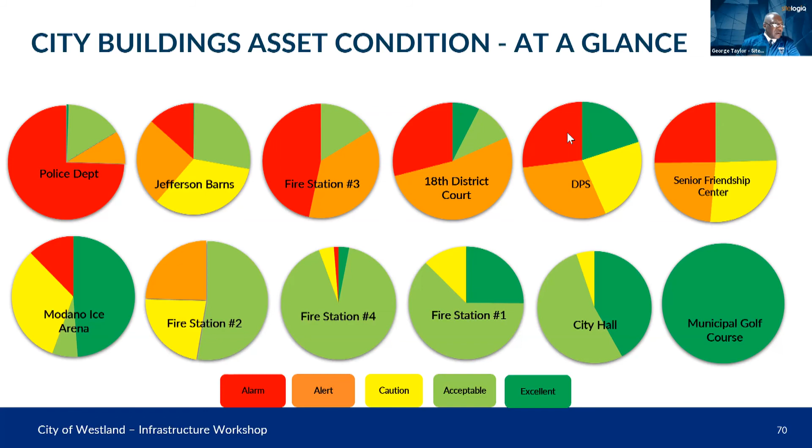That's an excellent question, Councilwoman. I'll take a swing at that. Scott, if you could flip to the next slide, 71. As you take a look at the dollar amounts, I think the snapshot—and of course we can provide many different snapshots, Councilwoman—we could provide you a snapshot in detail with regard to the life cycle of the equipment. And if we did that, that pie chart would shift based on that data set for life cycle analysis.

I believe the at-a-glance slide that we presented, and George, correct me if I'm wrong, was directed to the financial impact. Even though you see in the color chart some greater alarm, if you look at Fire Station 3 in this financial chart here—it's kind of blocked here—but when you look at the dollars associated with that pie chart, it's significantly less than what the capital improvement needs for the police station and Jefferson Barns would need.

In addition, we take into account the age of the police station, being a 1967 construction, and of course Jefferson Barns, as we all know, was built in 1942. So a lot of the mechanical systems in those two locations are quite dated. When we use our weighting tool within our program, it quickly raises the eyebrow at the true age of some of this equipment. The bottom line is, you're going to pay me now or you're going to pay me later on some of these things, and some of these systems are very expensive because of the size of the buildings. Whereas Fire Station 3 could have some areas with a high alert level, the dollars associated with repairing that particular facility are significantly less.

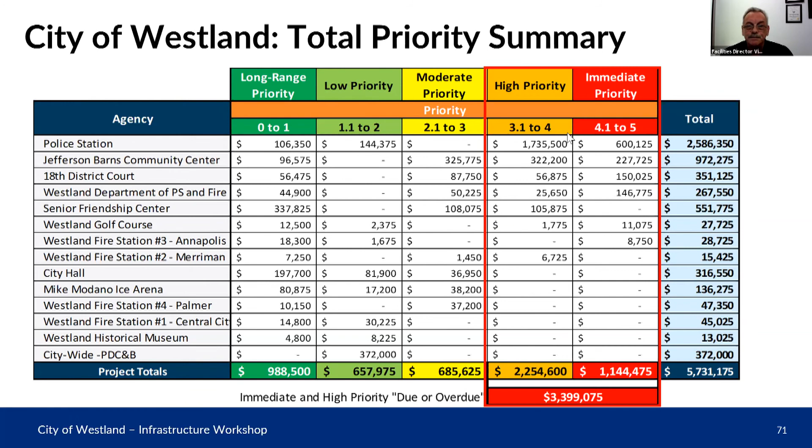A couple of quick questions. In recent years, and I think we can expect this again given the change in administrations from the federal government perspective, there have been grant dollars available for renewable energy resources. Have we looked into, whether with our grant writer at Nasserini Strategies or on an individual level, a cost benefit analysis of putting renewable energy like solar panels on any of our city buildings or facilities, as a potential long-term cost-saving measure and as part of our Mission Green program to lower our carbon footprint as a city?

And another question I had regards the Norway fire station. Obviously we're not using that at this point in time, but from a facilities perspective, if we were to bring that station back online, has it been inspected lately? Are we at a point where it could be operational if we decided to roll that back into our fleet of stations again?

Thank you, Councilman. In terms of grant dollars, I am looking into federal programs, working with Congresswoman Tlaib's office. She's putting out a lot of information, presenting some opportunities there, and we're certainly looking into that.